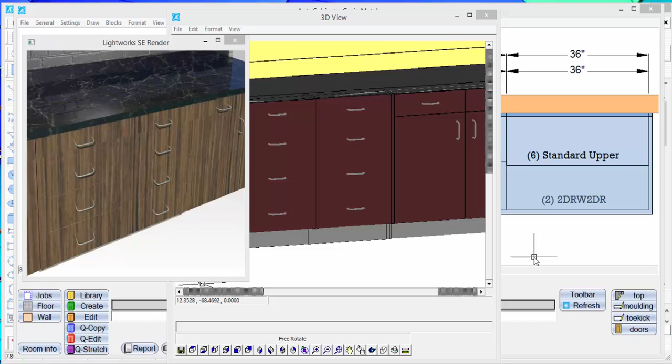More and more in cabinetry, grain matching is becoming increasingly important, especially with the new high-priced laminates out there that are available for residential and commercial applications. And AutoCabinets is more than capable of taking care of that.

We have just a little rendered close-up of these cabinets. I'm going to go ahead and close that, and we'll close this as well. Let's just put this up in elevation view, and you can kind of see it's just a variety of cabinets. Well, it's important a lot of times to actually grain match and pattern match these cabinets. So once the design is done, I can just select on parts.

We're going to export those parts. And here are my grain matching options. I have that selected. I want to grain match my slab doors, my drawer fronts. I can even rotate them if the grain's rotated on the material. I can even do them face down if I want to put the operations on the back side of the door. And I need to increase the pair gap to allow the size of the cutter to come through.

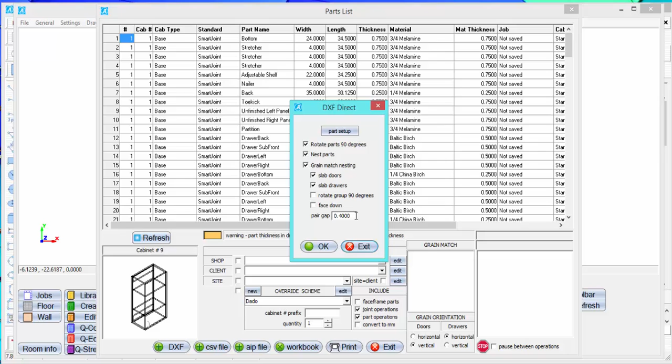So I've got all these pre-selected, and we automatically remember all those settings for you. So I'm just going to select OK here. I'll go back to my desktop, and I'm going to save these in today's work. And we have a folder already called Grain Match. I'm just going to name this job Grain Match and select Save.

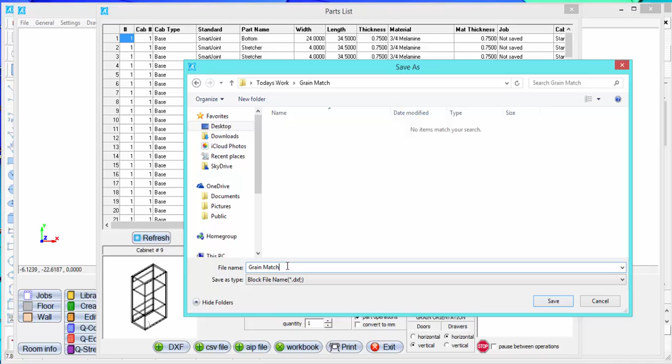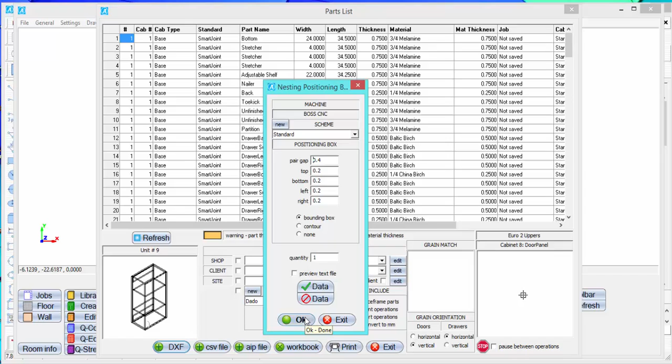It's going to go through and break apart all the cabinets, put all the CNC operations on all the cabinets, and also pull off the door and drawer fronts and increase the gap to whatever I've specified to allow the cutter to come through and actually machine those. I'm going to select OK here. I'm going to tell it to nest those parts.

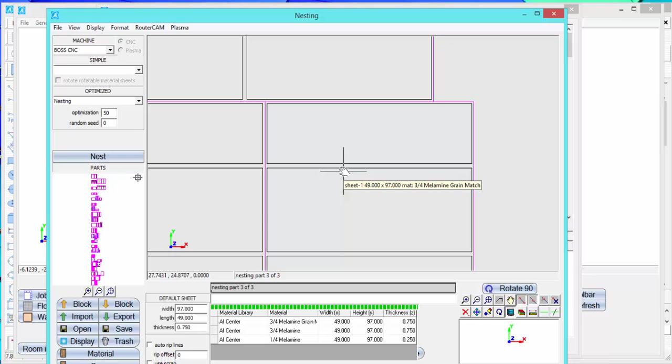And as you can see, here's our cabinet fronts. Here's those two drawer banks, and we've increased the space between them to allow for the cutter to come through and actually machine those correctly. Then here's our two upper cabinets over here, our tall uppers. And then over here we have our smaller upper cabinets.

And then on these sheets up here, we obviously have our toe kick notches, our CNC operations, our upper panels and stuff like that. And these are all melamine, whereas these are grain match material. So it knows to separate those materials out by grain matching.

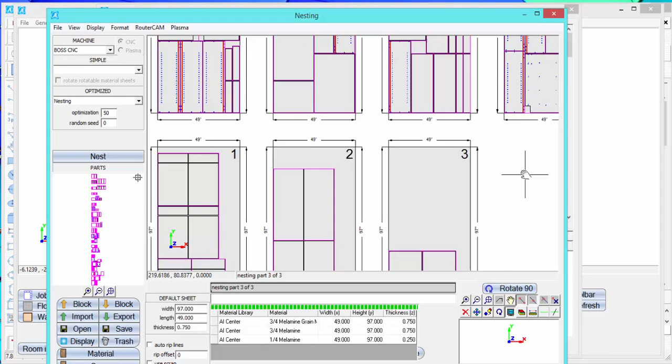Let me close this out for you. And again, there's our elevation. If I want to turn off the transparencies here, I'll just turn those off. And there you can see our cabinets.